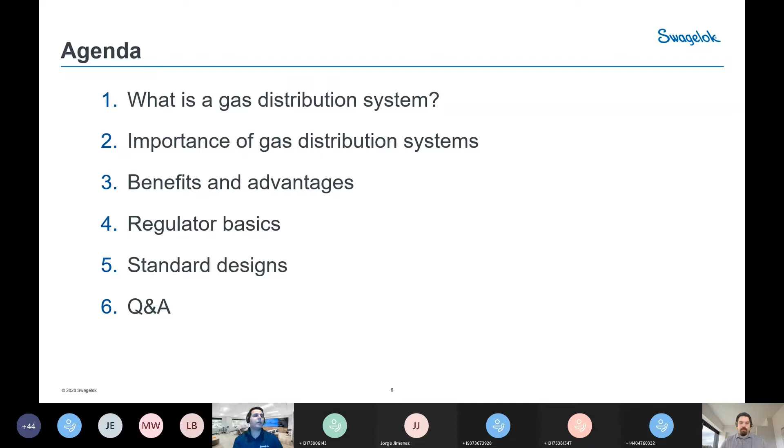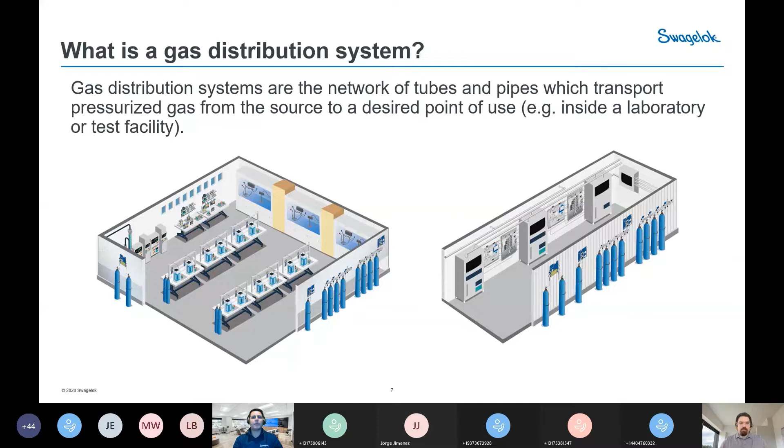All right, so let's start by looking at what gas distribution systems are. Gas distribution systems play crucial roles or functions for many industries. These systems work to deliver gases from a high pressure source to the facility at a pressure rate required by each of these applications. So the systems are designed to provide precise and safe delivery of high pressure, toxic, corrosive, or flammable gases in some cases.

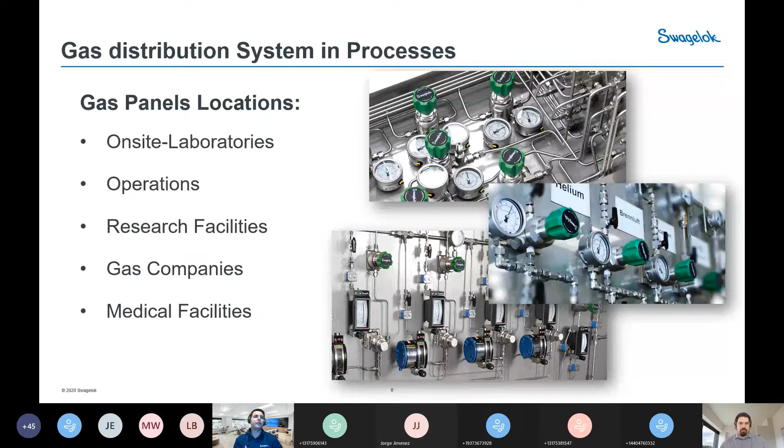Gas distribution systems can play different functions and be used for different purposes. Customers may have a need to use gas panels based on applications, the functions, and needs. To list a few of these usages of these systems: they can be used as an access point for gas supply, maintain the purity and quality of the gases, reduce the source pressure to a lower or constant pressure, enable an uninterrupted supply of gases. But it can also play a crucial role in handling reactive, toxic, and corrosive gases. And in some cases, like in semiconductors, they can also handle expensive high purity gases.

So when the systems encounter issues, it can really result not only in the loss of gases, but also loss of efficiency of these systems, and it can affect downtime and safety. So when system operation is not intuitive, when leaks are a concern, or when gas panels are difficult to service, it's time to take a closer look and take some actions to address these challenges that you're facing with these systems. Safely, reliably, and effectively delivering gases to where they need to go provides the foundation for well-performing operations when you use these gases or these systems.

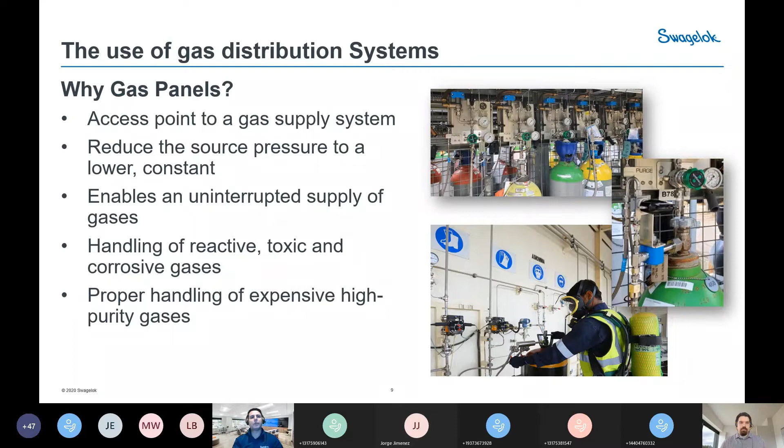There are some definite advantages that gas panels offer for customers within their operations, applications, or industries. First and foremost, they need to ensure safety.

Designed with safety in mind, these systems need to ensure the safety and well-being of the operation as well as the team members. Additionally, these systems need to be designed and labeled to be both easy to understand and safe to operate. They also improve uptime and reliability, as these systems are always intended to help maximize gas usage within their applications.

They support increased uptime and improve process accuracy and repeatability. Also, the third aspect is they save you time and resources. When they are fully assembled and tested prior to being installed, they ensure the reliability of the performance of those systems and let you focus your time and resources where you need them most.

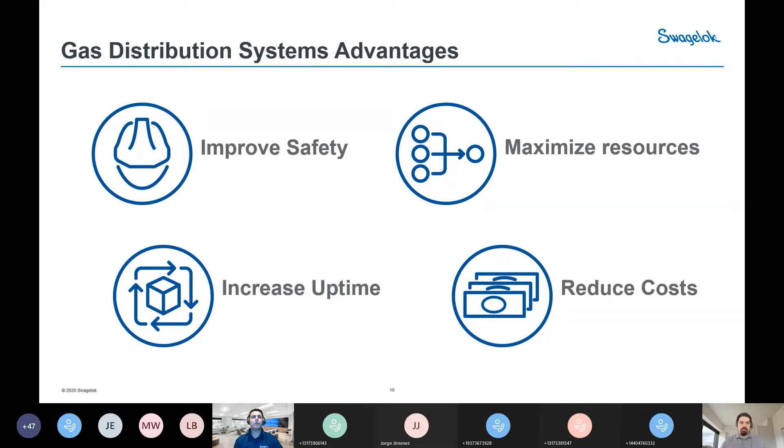The reliability of these systems can also lead to a reduced need for maintenance, saving you additional time and resources that you'd have to spend on maintaining and servicing them. Reduce cost is the last element there, by avoiding leakage and unplanned maintenance, so they should be easy to maintain and troubleshoot for the operator.

Let's look at some areas where we feel there's a need to pay attention with these systems, and how they fit into the four segments I just shared previously. Something usually taught in school, we call it the fire triangle, also known as the combustion triangle. It's a simple model for understanding the chemical reaction which must occur to create a fire within a gas distribution system. For example, let's consider oxygen.

The primary hazards for oxygen are the high pressure cylinders, typically in the range of 2200 psi to 3600 psi. Gas pressure systems are built with materials such as brass, copper, and in some cases stainless steel, and also soft seal materials like Teflon, etc.

All of these are a form of fuel in an oxygen environment, but by its very composition, an oxygen gas handling system already has two of the three required legs of the fire triangle, namely oxygen and fuel. So the safety of the operator and your plant or facility will depend on your ability to control the heat or ignition source for these systems.

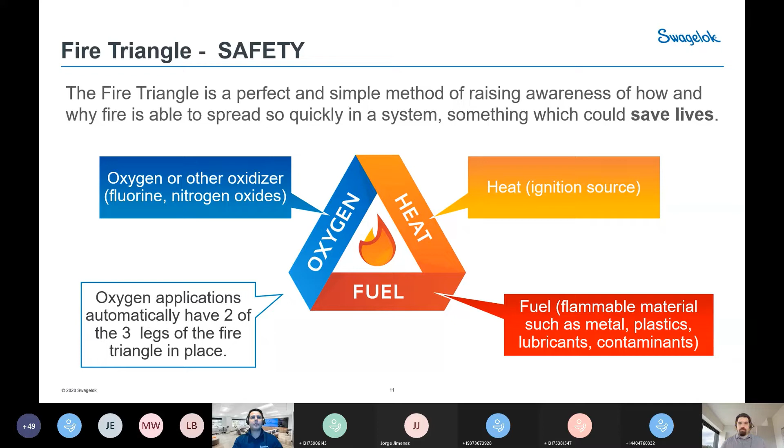Changeover systems are another area with some misunderstanding about what a changeover is. There are two types. The first is what we call a manual changeover, which provides a continuous supply of gases from two or more source containers.

The manual ones are typically systems that need to be operated manually to enable the switching mechanism, as you can see in the illustration here. This system typically has several downsides: you need to manually reset the valve when the first bottle empties, opening and closing the isolation valve to disconnect the cylinders. It's more time consuming and requires a lot of involvement from the operator to go into the field and make sure they change the bottle and switch to the second source.

There's a risk of running out of crucial gases. The intent of these systems is to continuously supply your operation with gas, so it really doesn't do its function when you have to manually go and change it. It can also lead to premature changeout because you have no indication of when the change needs to happen, so you rely on best guess. They require more involvement and monitoring from the operator.

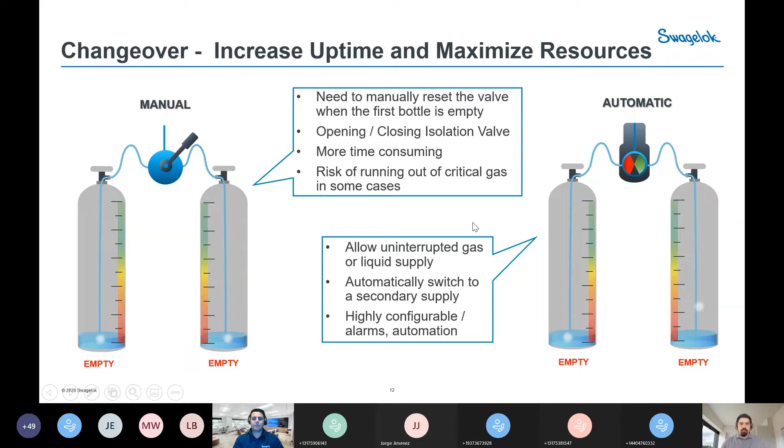So the third element that I wanted to highlight is filtration. As we all know, there is an increase in use of all types of gases, mainly driven by process requirements for manufacturing. In order to achieve and maintain system integrity and performance, the selection of an appropriate filter is absolutely essential and crucial for maintaining operation of these systems.

The main source of particles are industrial gas components used within these systems, such as check valves, threaded fittings, ball valves, tanks, and pumps. In some cases, the environment where they are installed can also lead to particles. Though they are crucial to the process, these components may release particles through the installation itself.

When dealing with filters, there are a variety of options, but there are some criteria we need to pay attention to when choosing a filter, such as the filter component, the element, the material, and the housing. We need to keep in mind that the selection of the filter needs to match the task at hand. In general, regulators are susceptible to damage from system particles.

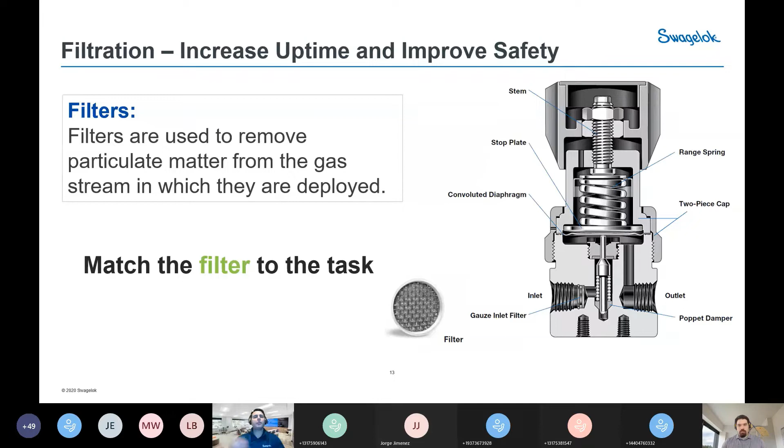It's important to look closely at the design of any pressure reducing regulator, and at a minimum they should be equipped with some sort of filter element, as you can see in the image. Usually they can be press fitted. A best practice is to install a filter upstream to protect the component, and also the system integrity.

So let's take a look at some of the basic fundamentals of gas distribution systems, and specifically a key element, or a product, in these systems.

Something to keep in mind when dealing with regulators is that there are two types. When dealing with downstream pressure changes, those are controlled by what we call pressure reducing regulators. But upstream pressures are controlled by back pressure regulators.

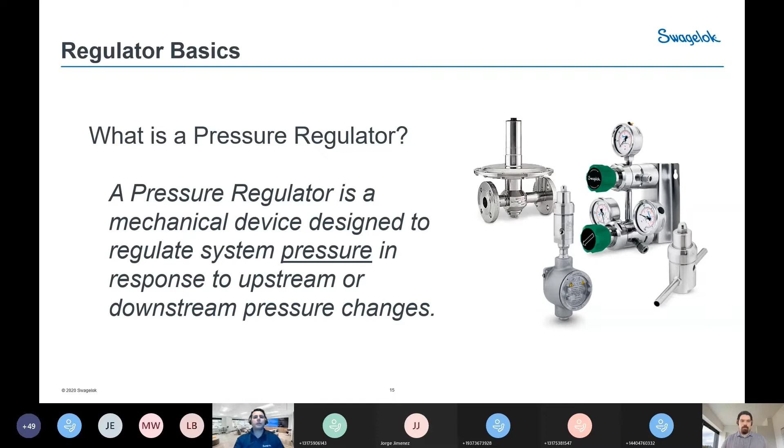When dealing with gas panels, we need to correctly select and size the pressure regulators because it's a crucial component of a properly functioning gas distribution system. The aspects of performance that are most important when choosing pressure regulators for one of these systems include the droop, the lockup, the seat load, the choke flow, and supply pressure effect.

Lockup is the difference in pressure between flowing and non-flowing conditions. When flow stopped at an outlet pressure, as the outlet pressure built, the balance of force favored the control element, which allowed the poppet to seat itself and close off the inlet pressure.

The second one, which we call droop or flow effect, is the reduction of outlet pressure experienced by a pressure reducing regulator as the flow rate increases, and that's the ideal area where you want to maintain regulator performance.

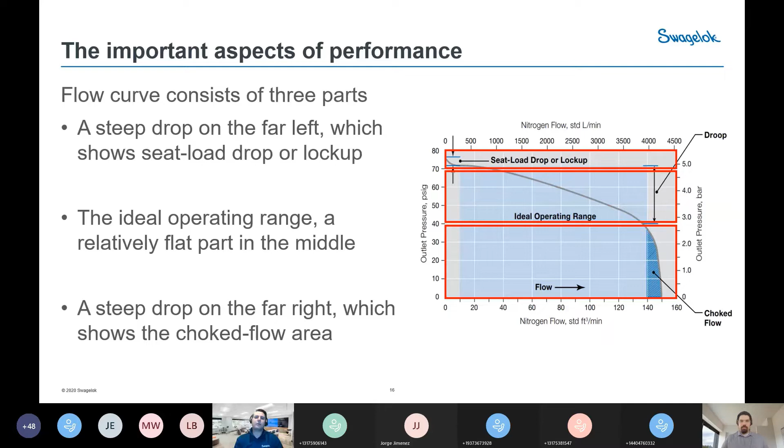And the last one, which is choke, is when a regulator is fully open in the open position and it's no longer performing its function, it's acting like a normal valve, just fully open and not controlling the pressure. So now that we understand some of the design characteristics, along with some of the decision factors, I will hand it to my colleague who will give you a closer look at our standard design, their design benefits, and some of what Swagelok considers best practices for gas systems.

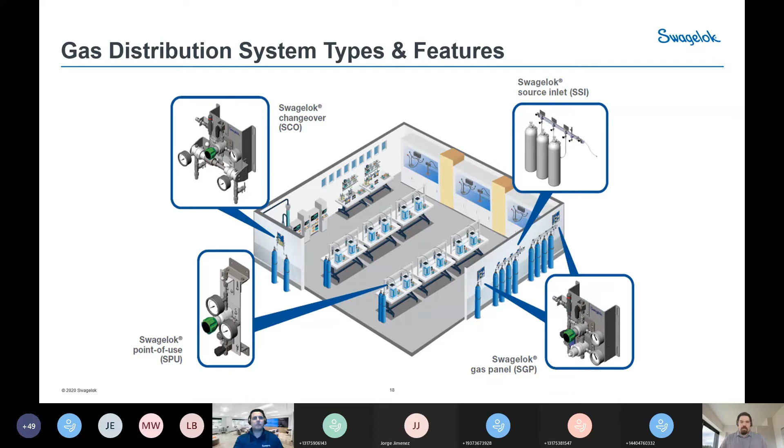We'll begin with a breakdown. So for defining our gas distribution systems, we decided to break it down into 4 separate subsystems, and we'll go into detail a little bit on each of those and how they interplay with one another.

We begin, as most gas systems do, at the bottle that's supplying all the pressure. So we have a system specifically targeted towards this. We call it the source inlet.

The real goal of this is just to connect your bottle to the rest of the gas system. As we were designing, we discovered that there was a great need for a lot of flexibility here. So this one will have various options for connecting multiple bottles or single bottles, manifolding them together if desired. It will come with various options for isolation, excess pressure relief, venting, and critically, as Karim was mentioning before, filtration.

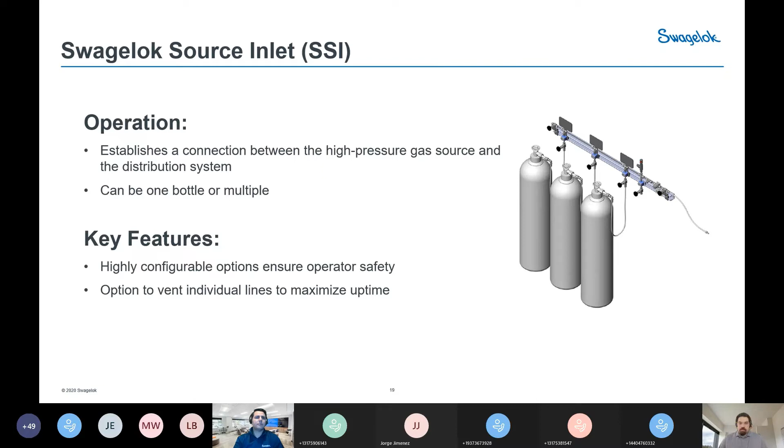As we all know, any sort of regulators or pressure dropping devices are going to be sensitive to having debris crossing them. So filtration is included in the source inlets right up front to make sure that the rest of the system stays as clean as possible. I think that's just about it for the SSI.

So the SSI will commonly feed one of 2 separate panels. The first is the standard Swagelok gas panel, or SGP. This is really your primary pressure regulation stage. These are available in either 1 or 2 stages of regulation.

The 2 stages of regulation can be very desirable for helping with excessive Joule-Thomson cooling and helping mitigate the supply pressure effect to maintain a steady line pressure on the outlet.

These are all going to be wall mountable, and they'll have various options. Obviously, pressure monitoring with gauges is going to be critical on all of them, but they also have various options for overpressure relief, venting, and outlet isolation, which is lockable. Very nice feature for performing maintenance, adhering to lockout tagout procedures and the like.

And these are also available with different types of regulators. So if you want a two-stage regulation for maintainability, sometimes it's nice to have two separate regulators for commonality of parts, as shown here, but these are also available with our KCY regulator, where you have two regulators in a single body.

The main goal of the SGP, I should point out, is although it is available with some of the lower pressure ranges, very commonly, feedback we've gotten from customers is that this is useful for dropping your bottle pressure to a supply line pressure that you'll be, say something like 30 or 40 bar to be distributed to other points in your plant, like a point of use.

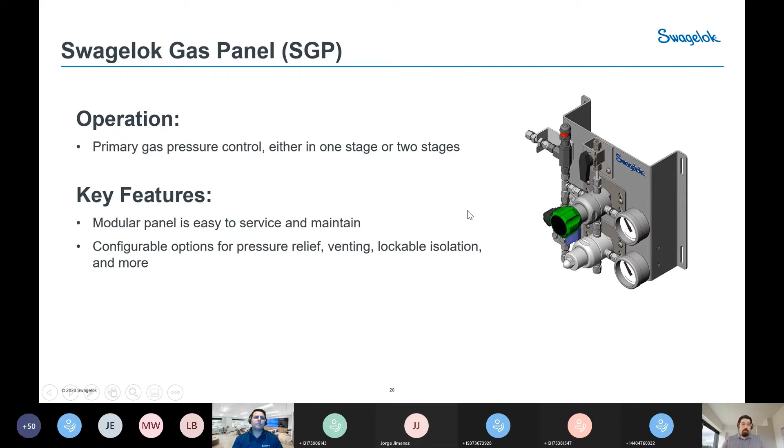Moving on to the changeover, or the SCO, as this fulfills the changeover function that Karim was describing earlier. This is accomplished by having two separate inlet sources, each feeding their own regulator. And these two regulators are set up at a differential pressure such that when the primary gas cylinder that you're drawing from reaches the changeover pressure, it'll automatically and seamlessly start supplying from the secondary source cylinder.

So the SCO is able to have either the left or the right side cylinders be selected as the primary source for some added flexibility. And they are also available with the same options as the SGP. So you have overpressure relief, pressure monitoring, and outlet isolation. And they're also available with or without a downstream line regulator.

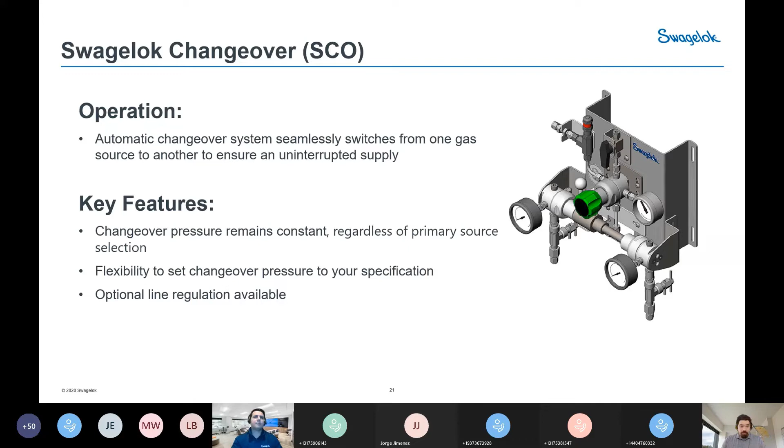Moving on to the point of use panel, this will typically be the last regulation stage before you're actually going to supply the gas to the device that requires it. As Karim pointed out, common applications will include things like lab equipment, process gas analyzers, things like that. So this is intended to take your line supply from typically an SGP or an SCO and reduce the pressure to the pressure that's required for that piece of equipment.

This one is going to look and feel a little bit different than the others, but ultimately it's still a regulator panel. So it'll have some slightly different features. You'll notice it's fairly narrow. These are designed so that in the event that you need to have several different gases available, say in a tight lab situation, they can be stacked very close to one another to minimize the footprint.

They're also extremely flexible in the mounting options available. You can mount them to walls, 80-20 that you've got up on the walls, above and below benches. Really intended to be flexible that way. Critically, these are also available with filtration, kind of a last step filtration to make sure that you're protecting anything that you've got downstream. Typically, there will be some sensitive or some occasionally some very expensive equipment that these are feeding. And it's important to make sure that the gas is clean as it's being supplied to them.

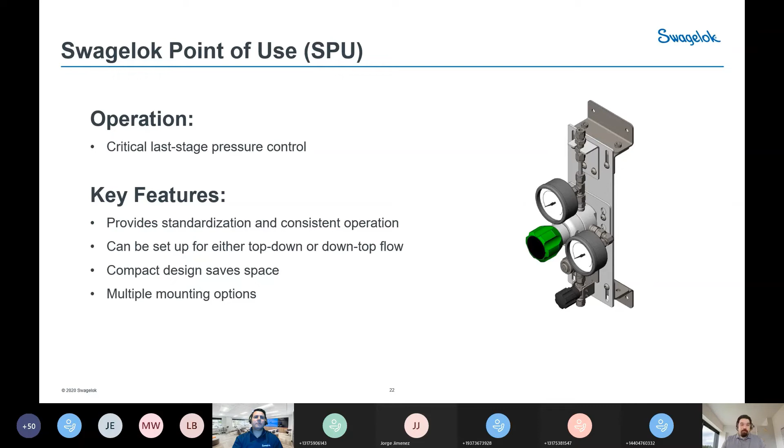One of the things we wanted to make sure we were supplying for these, as we begin to standardize these gas distribution systems, is that they're available with user manuals. It's very easy to generate sales and as-built drawings for them, and the drawing example even comes with a complete bill of materials. The way these are configured, it's also easy to provide a spare parts list, so you can have all your documentation ready at hand.

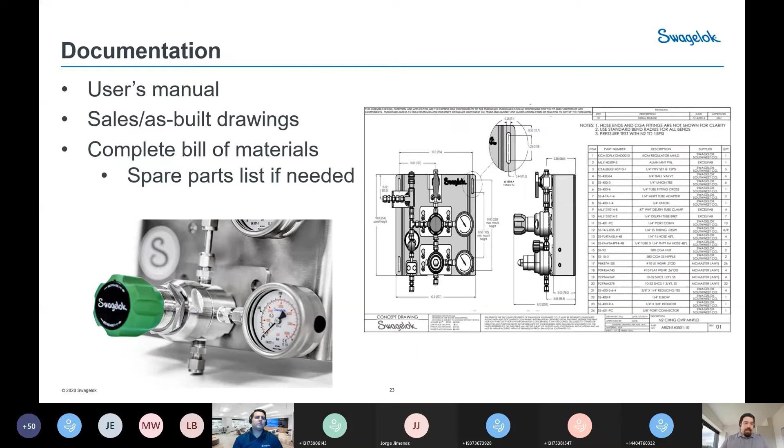Here's a couple of clips from our application guide to assist with the part numbering. You'll notice all the various options easily break down, just like any of our regulator catalogs, for those who are familiar with those. Our sales and service centers have also been equipped with some factory-developed tools to assist with creation of these designs.

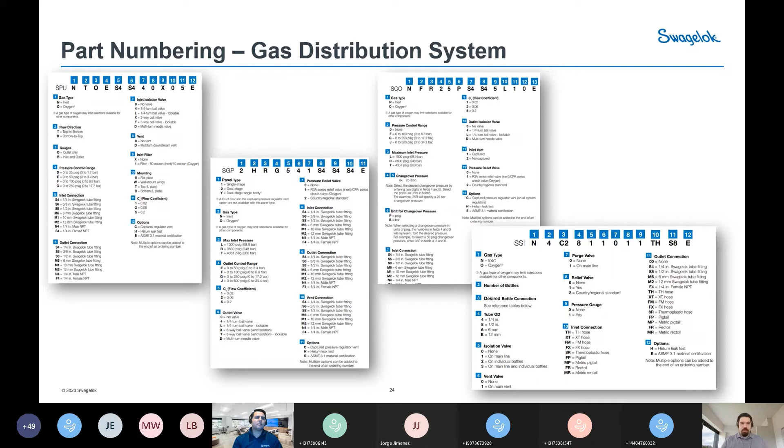Thank you, Joe, for the insightful update about the systems. I wanted to share some details on how we went about developing the solutions, but also what training our sales and service centers go through before they are able to design the systems.

It's more about us doing the training needed to support the development of these solutions and be able to customize them locally. So we currently have what we call a certification program. As Joe and the team mentioned, we develop these solutions, and we don't want to just push them and sell them. There is training that needs to take place before any sales and service center is able to assemble or configure these systems.

With the certification program, our sales and service centers go through extensive training on the design aspect and the theoretical aspect of these systems, to be able to design them and also make changes that the customer might need. After they go through that certification and extensive training, they're granted the certification to start building these systems and working with you, utilizing some of the tools Joe mentioned that we've developed to speed up the process.

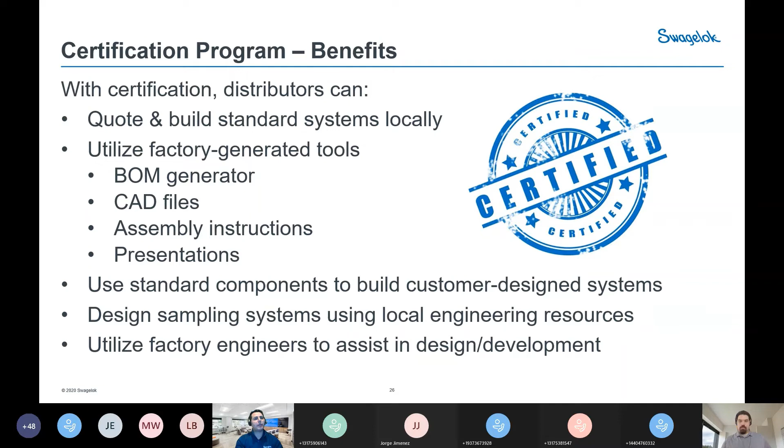We use standard components to build and design the systems, and we use local engineering resources that you can work directly with at our sales and service centers. Lastly, if there are applications that are very unique and challenging, we can tap into our engineers here at the factory, where they can assist with making the right assessment for that application and recommending the solutions.

After certification, we build that expertise and bring it all together. There is local support that you will have constantly from our sales and service center. They've all gone through that training, so they've built their expertise to design the system and also understand and assess your applications. All of these systems have been integrated with best practices from our standard designs, because we have about 70 years of experience in analytic consultation and these applications, we've developed what we think are the best practices and best designs available out there.

These systems have been designed with safety in mind, but also effective at delivering the gases needed. We've integrated them with best practices, like assessing the gases or media being used with them. They can be adapted to meet any requirement. So what you see there is not exactly what you want — we can certainly make changes and adjustments to the system to fit exactly what you need. That's just a fraction of what the team can do and support.

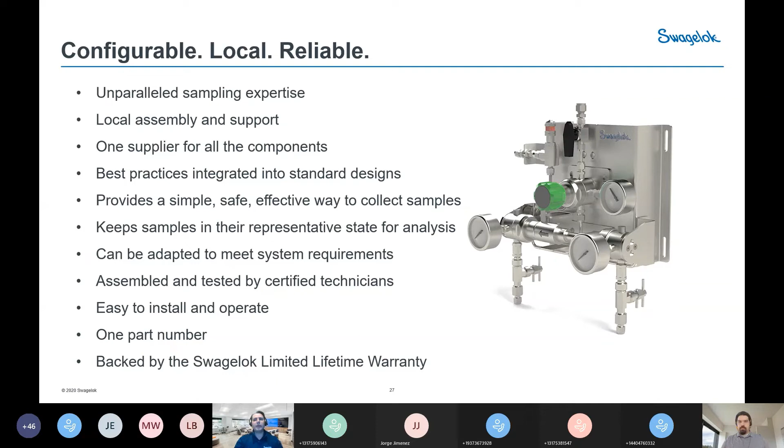We have a question that came through the chat. I saw options listed for oxygen and for inert gases. What about flammable or toxic gases, i.e. sulfur, chlorine mixes?

For most of the flammable gases that you'll commonly see, you should be able to use one of the inert system designs that's already available. Typically, what you'll need to look at is material compatibility, with any of the soft goods or any of the stainless steels. If you've got something toxic or like a chlorine mix that's going to be potentially corrosive, that'll have to be addressed.

The standard designs available should suit the majority of applications, but if you do have a particular need, a toxic gas that is not able to work with one of those, the gas distribution program serves mostly as a design platform, and so your local sales and service center should be able to assist you with a custom design that is able to suit your individual application.